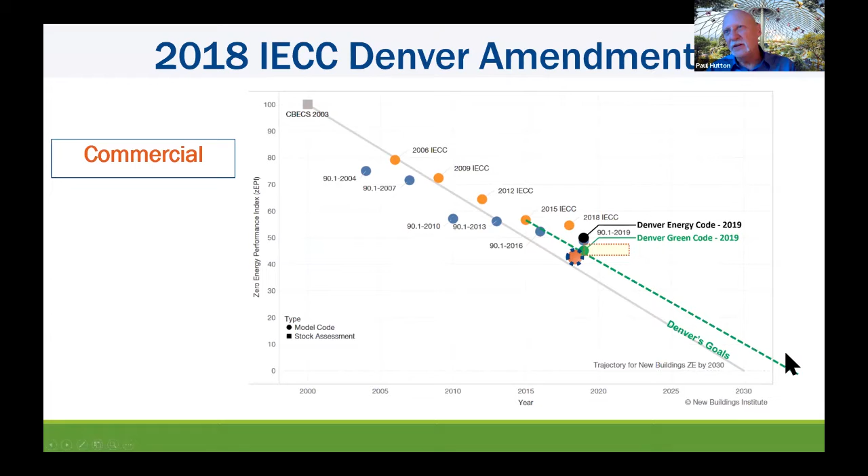Of course you've heard about AIA, but I wanted to mention there are many other organizations and rating systems that we as architects deal with. Probably one of the most well-known is the LEED system, put on by the U.S. Green Building Council, but there are many others now. When we do schools, it's CHPS. When we're interested in health issues, it's often Fitwel or WELL, and International Living Future is another one we pay a lot of attention to—that's about the living building standard, if you've heard of that. As architects, we apply these as appropriate, given the needs of our client and the project.

I wanted to share with you a project that's underway right now, a little further east of you, at Sierra Grande, just on your side of La Veta Pass. The reason I wanted to share this is that it's our first large building in a very long time that is 100% electric. It's also funded by the BEST statewide program, and within the existing construction budget, not as any extra add-on, it has its own ground-mounted PV array. This is a 90,000 square foot building that normally would be highly energy using, but in fact is highly energy efficient and will be net zero.

In fact, it's designed with the standard we call passive house. When we do passive house, it's an approach where we actually take dollars from the construction budget and invest more of them in a better, more highly insulated envelope. As a result, we can simplify and reduce the cost of the necessary mechanical system. That's why we can do an all-electric school in a situation like this, because normally an all-electric building would be very expensive to run. One of the things we're starting to do now on many of our projects is a full carbon model—this is something relatively new for us and most architects.

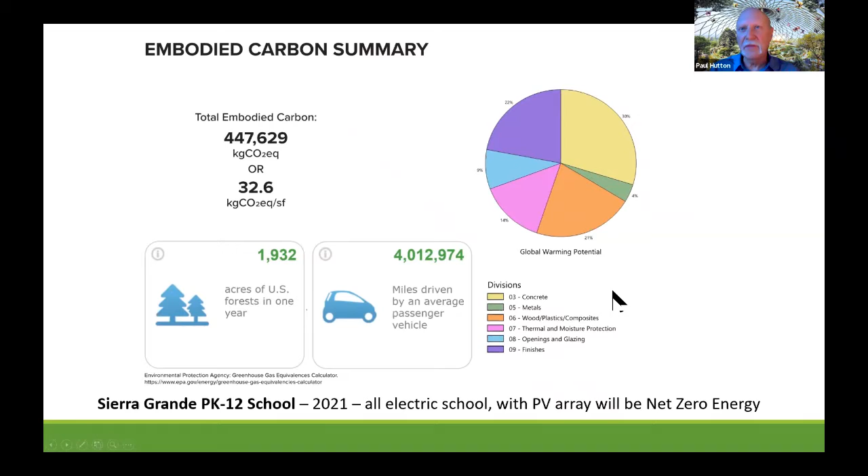And this is one of those buildings that's LEED Silver. I wanted to mention the LEED Silver aspect because it implies a certain minimum level of energy efficiency. This building was required to be at least LEED Silver because there were DOLA, state of Colorado, funds applied to the project. DOLA has been a great supporter of energy efficient buildings - it's a wonderful program we're always excited to work with.

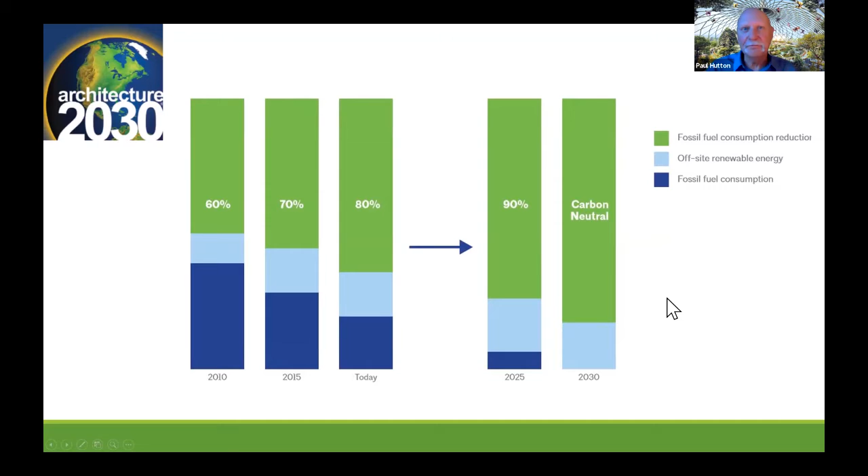One of the things we do as a design firm is model the energy use in every one of our new or addition projects. We calculate that out and report it to a national database. This is our annual report, and this is what it looked like last year.

You don't have to worry about how detailed it is. Just look at that bar on the left, 49.9%, which was the average energy use reduction of our entire portfolio last year. So just about 50%. Remember, the target last year was 70%, so we were 20% behind—pretty good, but we're trying to do better. This year, of course, we're striving for 80%, so we have a lot of work to do.

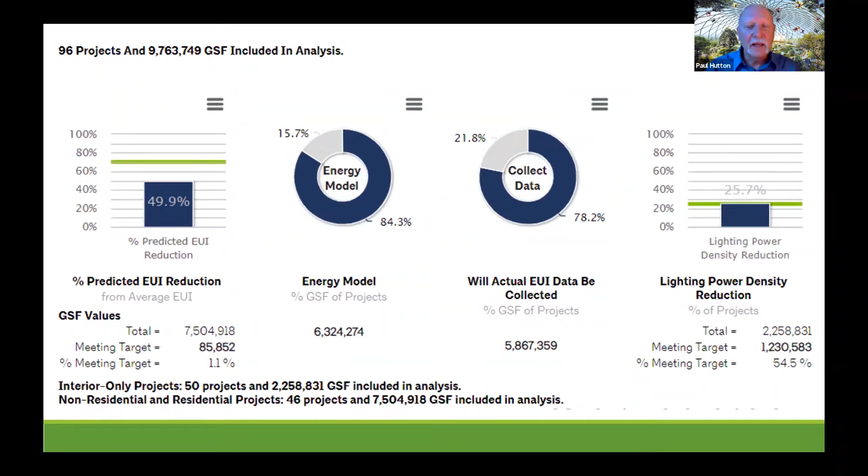We also collect data on a lot of our completed projects. That's this bar here, 78%. We also have a target on how efficient lighting is. The term we use for measuring lighting efficiency is lighting power density. So I just wanted to give you a glimpse at the degree to which design firms are really digging in and understanding the performance of their buildings. This is something that's very important to us.

One of the things we do at Cuningham that's actually unusual is we've looked at our internal operations. We have 6 US offices, 2 overseas offices—one in Beijing that does the kind of crazy stuff you see behind me, and one in Doha. We wanted to know what was our operational carbon footprint, not the impact of the buildings, but how we run our businesses. So here's what we learned when we dug in for an entire year.

We found that all the buildings and offices we occupy were only about 22% of our carbon footprint. Commuting, based on survey estimates, was another 17%. And transportation, especially air travel—because of how spread out our many offices are—air travel alone was more than half of our carbon footprint.

Now, you could probably guess this year that's greatly reduced. I don't think we've had any flights since March 13th, so we're probably going to be less than half of our former carbon footprint. But this is something we're updating on an annual basis, and we have a goal of being 100% offset on our entire internal footprint by 2022. So just 15 months from now, we'll be a net zero firm.

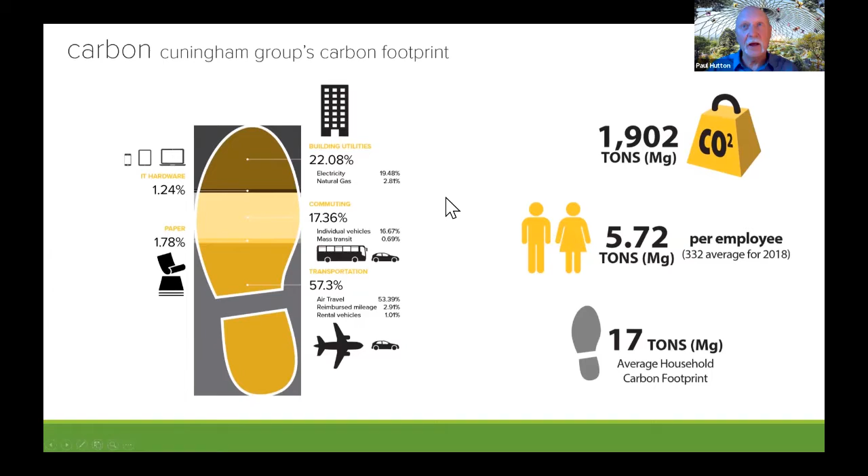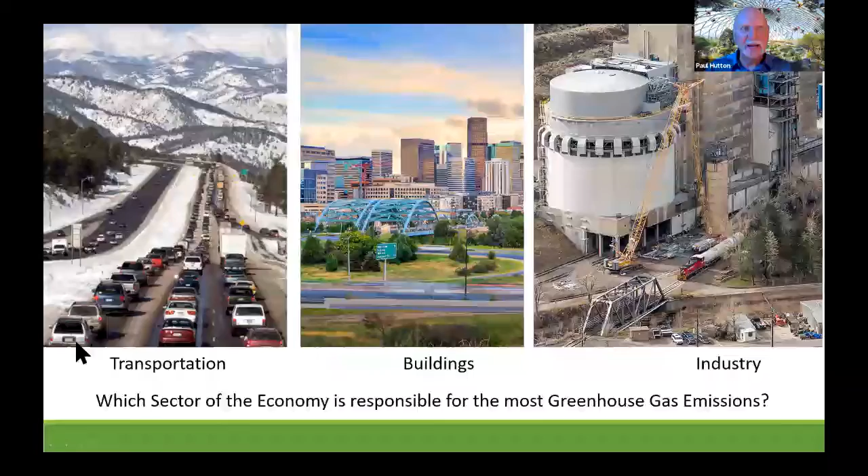So Representative McLaughlin already tipped you off to the answer here. Normally I like to ask my audience: if I were to ask what sector of the economy—transportation, buildings, or industry—is responsible for most greenhouse gases, what would you say? Of course, you already know, you had a clue, it's buildings. And that's a surprise to most people—they tend to think transportation or industry must be more impactful, but that's not the case.

Here are a few more charts to take you through this analysis. When we look at building operations—that's all the electricity, natural gas, propane, occasionally wood we use to keep buildings warm, cool, ventilated, and lighted—that's not too much more than all of transportation. Now look at this big gray blob on the bottom of the pie chart: industry at 43%. You might say, wait a minute, didn't that previous slide just tell us industry was not as much as building operations?

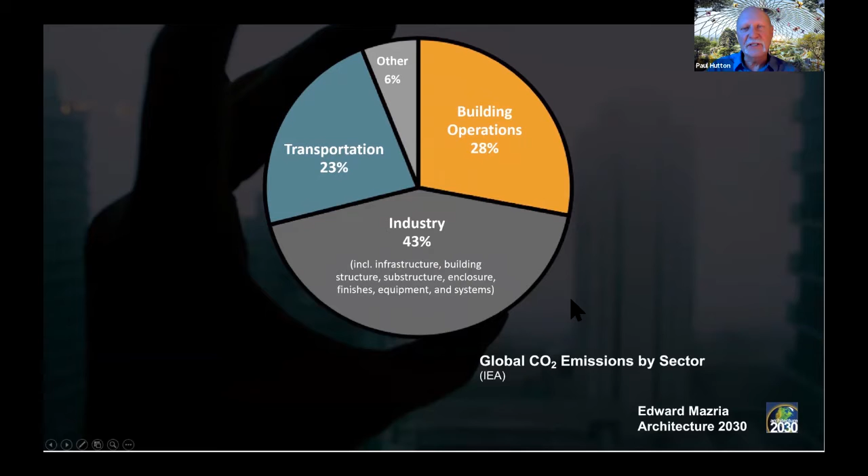What we need to do is break apart industry and see what's really going on in there. When we do that, we find industry actually includes a tremendous amount of materials that go to nothing but construction. Concrete, cement, steel, bricks, glass, aluminum—all those products that end up in our buildings are fully 11% of worldwide greenhouse gas emissions. So when I add that 11% to the 28% that is running the buildings, that's where we get to that 39%, which we often round up to an even 40%.

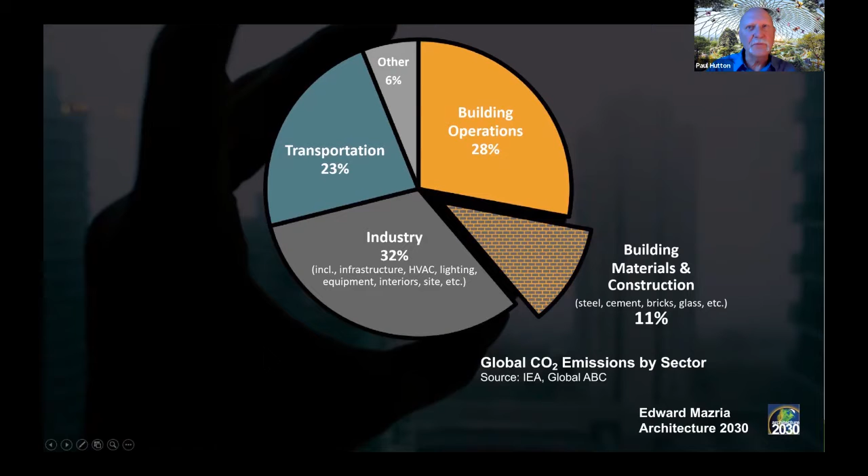So this is the pie chart that helps you understand, and this is global, by the way. The US tracks almost identically to this global picture. So I just wanted you to see that and have a mental image there.

Now when we think about the built environment and where carbon is coming from, there are three big pieces. The first is buildings we're still designing and building between now and the next 10 to 20 years. The good news is we're getting pretty darn good at making those buildings more efficient. We already heard about a member of our audience who has a net zero energy house—once built, it isn't responsible for any greenhouse gas emissions, and we love that.

We still do have a major problem to solve in our existing buildings, because there is no mechanism by which we can automatically upgrade and therefore reduce the emissions coming from those existing buildings. And finally, as I've tipped you off, we now have this issue of the materials, construction, and infrastructure—all that embodied carbon.

It's a relatively new concern for us designers that we've got to start tackling. So those are the three key areas of carbon that we're thinking about in the built environment. I'm going to focus a little more on the material side.

Three key things we can do much better with materials: first, we can reuse. Reuse can take many forms. We can take old buildings and find ways to repurpose and preserve them instead of just knocking them down or sending them to landfill. In Durango, you've got some great examples of buildings that have been adaptively reused through the years. I've had a chance to tour a couple of those.

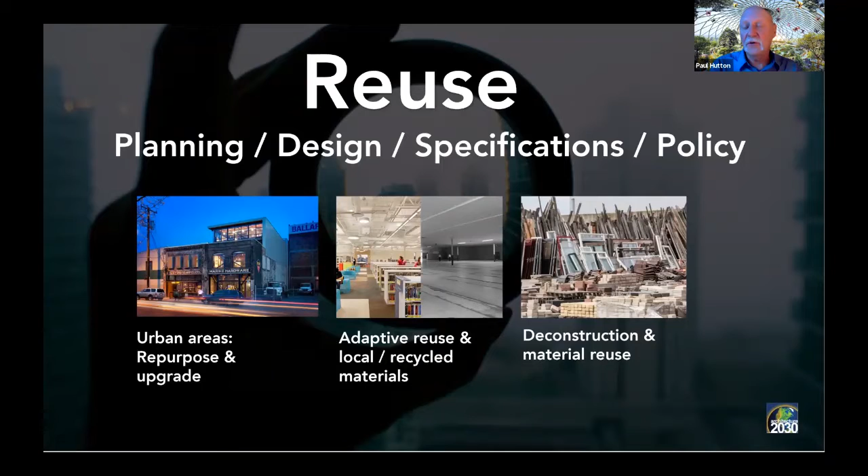So that's a key concept. One of the ways we're thinking about deconstruction is something we call a material passport, which tracks the material fraction in a building—essentially, just like a passport, tracks the presence of that material so a municipality could know what inventory of materials it has within its borders.

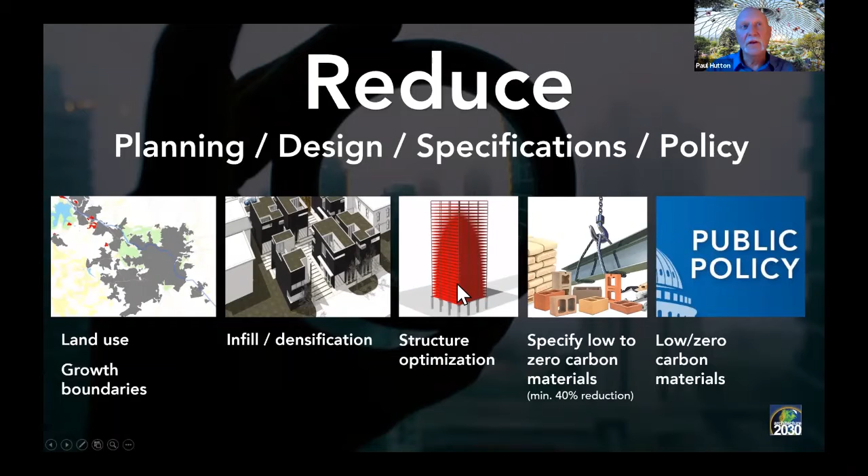The next strategy is to reduce. How can we, for example, design with less? How can we make our houses and commercial buildings smaller and still have the same functionality? How can we take our urban areas, whether a town the size of Durango or a large city, and make them denser instead of sprawling out? Even when designing a building, how can we optimize its design so it uses fewer pounds or tons of material?

So these are all things we're actively pursuing to reduce embodied carbon. And finally, there's the whole notion of sequestering, something I find really exciting. For example—and you'll see a project that does this shortly—can we use wood in a sustainable way? Because wood is sequestering carbon. Can we embed it into our materials, into our buildings, and use it even as extensive amounts of structure? That's something you'll be hearing about.

We're looking at ways that concrete can sequester carbon within it—that's something pretty exciting. We're looking at a lot of biomaterials now. And finally, when we design the landscaping around our sites, how can we design landscaping that starts to sequester carbon? By the way, a lot of typical landscaping, especially if it involves bluegrass, is actually a net emitter of carbon. You have to design a landscape very carefully so it becomes a net absorber of carbon. That's something we're really starting to work with a lot more.

And in fact, we as architects have targets now. Remember I had targets for operational carbon reductions in our buildings with the 2030 program—you might recall we're at 80% target reduction today. We have reduction targets already in place for embodied carbon in these materials. Right now, we're striving for 40%, which is ambitious, admittedly. Here's our timeline to get to zero by the year 2040, only 10 years after we get to zero on the operations side.

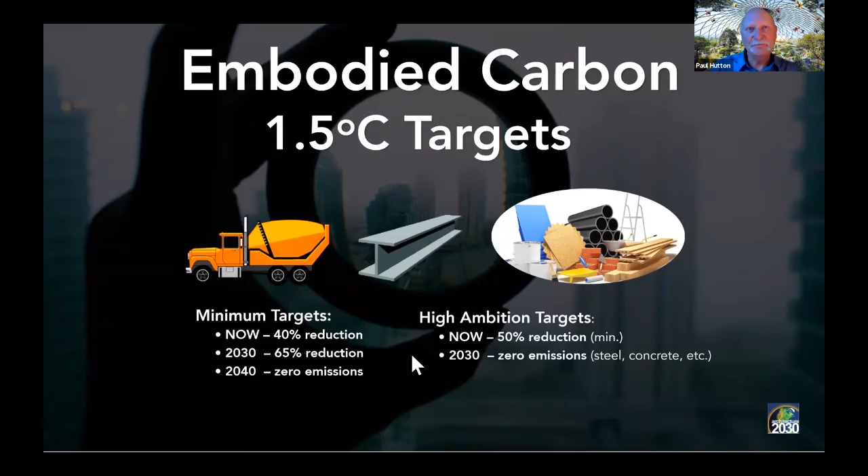I wanted to share that the state of Colorado is active in pursuing this objective. Only one other state has tackled this issue of carbon in embodied materials, and that was the state of California. There was a bill that got pretty far through the process last year before everything went on hold due to COVID, and we're assuming it will be back this year—we're excited to help craft and support it again. That bill, Senate Bill 20-159, said that all materials going into state-funded projects—concrete, cement, steel rebar, glass, and mineral wool insulation—have to meet standards around embodied carbon to end up in state-funded projects.

Pretty exciting development. I think we'll see more and more municipalities, states, and the federal government take this issue into consideration at certain levels.

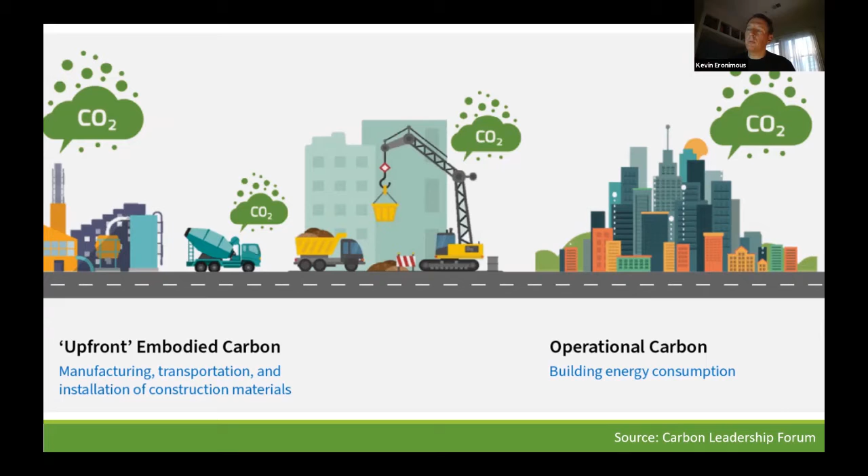And Deborah had used this analogy to help people get their arms around embodied carbon versus operational carbon. A lot of people through the last 6 or 9 months have been spending more time at home doing more traditional things like baking bread. And this one resonated with a few people. I think we can all understand a farmer's field, the irrigation, the fertilization, the harvesting of wheat, bringing that to a mill, grinding it, bringing it to packaging and flouring, delivering that to the store. You can think of that as the embodied carbon component. And maybe the operational carbon component is actually turning on your oven or using your mixer or the lights and gas in your own home. It's a handy way to think of it.

And again, maybe this is preaching to the choir, but beyond the energy aspects and some of the health aspects that John was asking about, really thinking about people, planet, and profit altogether, we need to consider not just the first cost, which can be a problem with, say, developer-driven clients sometimes, but the whole life cycle cost. What's the operational cost? And then look at those in a holistic manner, because I think what we find is a building, yes, can be more expensive to build in a really solid and enduring manner, but over the life of its use and reuse or dismantling, there's a lot bigger bottom line there. So that early build expense often can result or should result in much less operating cost.

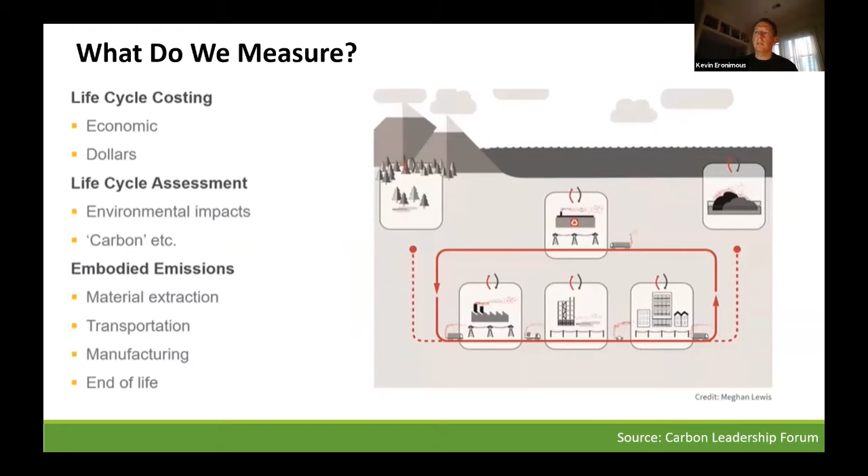So Paul mentioned before some of the things that we are measuring, probably more than we used to, certainly the life cycle costing that I just mentioned. That whole assessment of not just the dollars, but the impact beyond that. And then looking at this list of embodied emissions, whether that's extraction, transportation, manufacturing, and then what happens to it all at the end.

And I don't believe I have the images in this presentation, but as we talk about the mass timber buildings, we'll look at one of those. We're seeing some interesting things happen within the building code that are allowing for taller and taller wood buildings. And of course, that has its benefits in the characteristics of wood being a renewable resource and being so darn good at sequestering carbon.

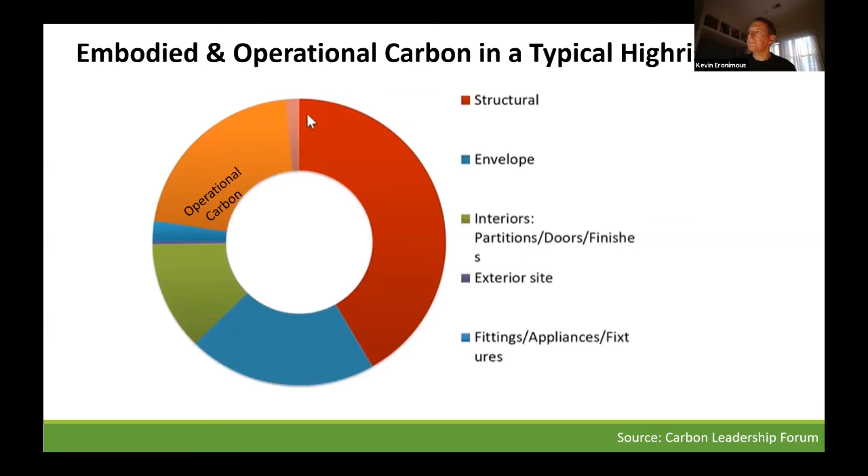One of the other things that we talk about a lot, and I mentioned in the chat before, the International Living Future Institute is a group that we'll spend a little bit of time on today. There's this notion that transparency leads to transformation. And we all probably look at the nutrition label when we pick up a loaf of bread or a bag of chips. And the notion that knowing what is in that product guides you hopefully to make a better choice and put down the bag of chips perhaps and get some vegetables.

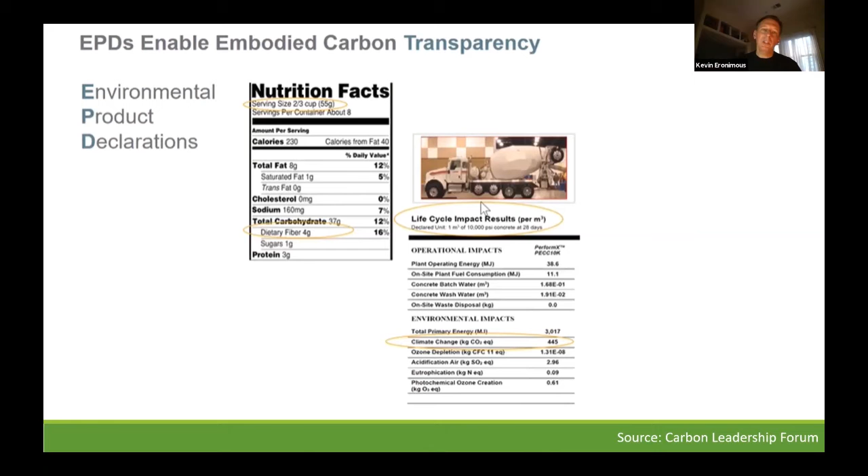That notion has transferred now to the building industry in a couple of ways. This environmental product declaration, this EPD, is something that we're seeing more and more of in a few venues, and it's looking more at sort of an ingredients list for your building. And the JUST label is a similar thing with the International Living Future that actually looks at the social component of your firms as well. So what's your gender equity? What's your pay equity? How do you support your community that you're in? Those lead to a healthy organization, just the way that the materials we select can lead to a healthier building and less impact in the long run.

So this was the small analysis I mentioned between concrete and steel, and as we dive into the materials, it maybe makes us think about those materials in a different way. Concrete, of course, is a centuries-old material. The Romans used this, and it is still standing today. Sort of a technology that was forgotten for an awful long time, and reinvented, or refound, somewhere around the late 1800s, and has certainly evolved in its makeup, composition, different means of strengthening it, and how we use it together.

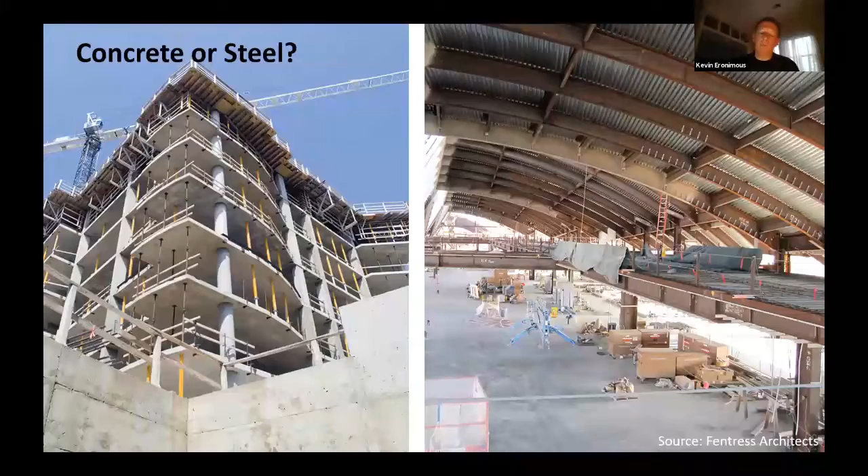And of course, steel has the properties of being able to perform wonderfully in tension, very good for long spans. Both of these materials do have a substantial cost in terms of extraction. So when we look at those carbon impacts of concrete, there's getting this stuff out of the ground. As you make concrete, the cement, the binding agent within concrete, is very energy intensive. It's a firing process, a chemical reaction, and that creates emissions of its own, mixing that as well. And then the transit to a site, how it gets used, and what happens to it at the end of its life.

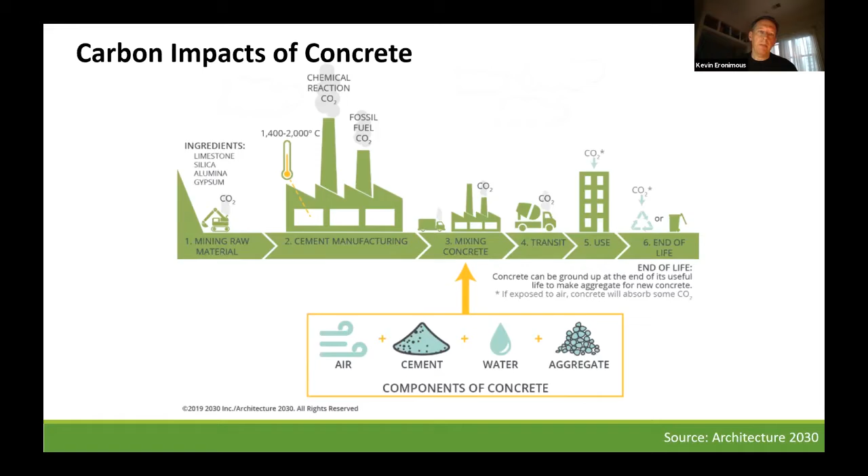So concrete is a little less apt to be reused depending on the form that it was installed in. Sometimes, like a precast building, the T-planks that you see, they can be reused. But a lot of times a building that's concrete frame is generally demolished, and some of that can be diverted back into new aggregate or base or reuse. And then steel, again, the extraction process for the materials is very intensive, very disruptive to the environment.

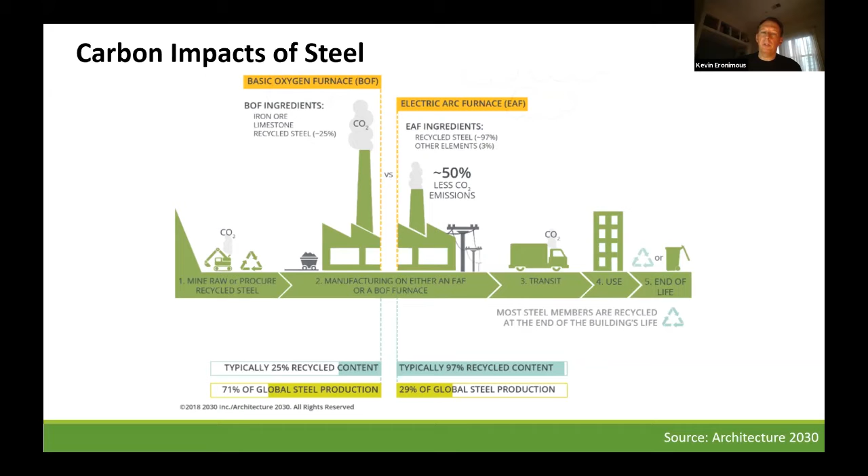And it too goes through this firing process. So this basic oxygen furnace that puts these things in together creates the iron ore that's extruded through. And then you have similar issues of transit and how it's used. You will see that there can be better opportunity for recycled content in steel, and sometimes it has a better chance at the end of its life cycle to be reused.

And that's illustrated in this slide pretty well, that concrete, some of it can be recycled, or downcycled, a pretty good portion of it with a mindful contractor and owner. Timber, depending on the form that it takes, can also wind up with a lot of it going to the landfill. And then steel, despite that very intensive early process of extraction, has a better possibility for reuse.

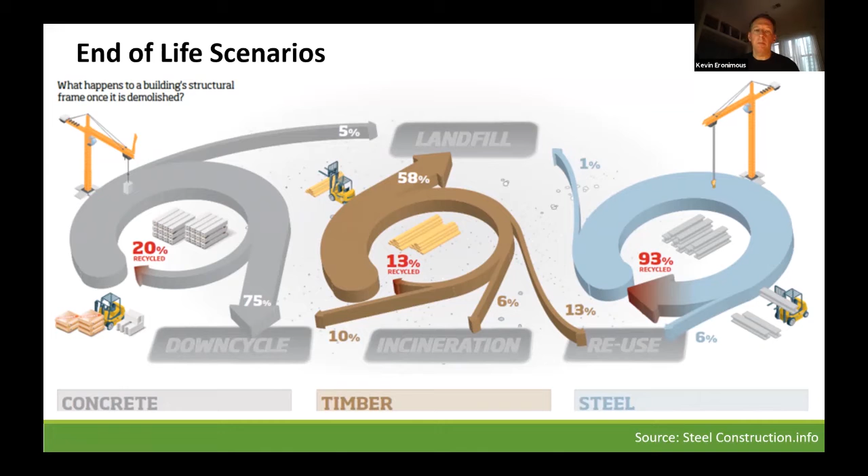So these are all things that we weigh when we're looking through our material options in designing a building. And then there's all the other factors that go into it. How big does it need to be? How tall does it need to be? What are the spanning requirements, and all of those notions.

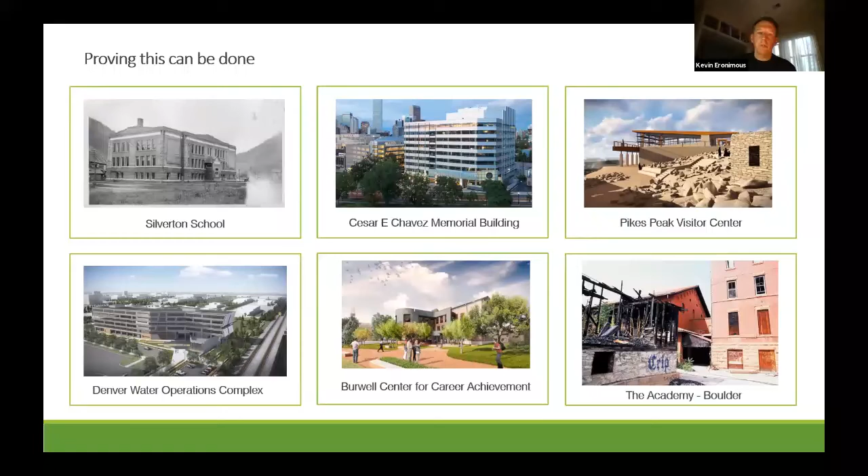So we'd like to talk a little bit about some examples, both near and far, that have varying degrees. With a few exceptions, these are not net zero buildings, but they focus on different aspects of the larger issue. And some of them actually will respond to the questions that were asked. And then I think I have a few that aren't even on this cover slide that we'll go through as well, that are more local to Southwest Colorado.

And actually, we'll start with one. We have two that focus on reuse, and the embodied carbon that goes into a project at its creation, especially when it's a long-standing old building. There's tremendous value in that in terms of the environment and also the character and the history, the cultural connection of a place.

This is Mount St. Gertrude's Academy in Boulder, now called the Academy, which was first built way out on a hill near Chautauqua Park, near the Flatirons, and fell into disrepair, was used by the university, had a pretty bad fire. And I want to talk a little bit about this and the characteristic of owners, because I think John asked this question about what are some things we can do to incentivize people. Hopefully it's not that a fire burns down the building and you have to reconsider the systems completely.

But even with that case of what happened with the main structure here, there's a real dedication required from the client, the owner, and the owner and client that did this project over 20 years ago still operates it. There's some vision, there's some grit and determination that's going to be required to resurrect a project like this. We'll look at something closer to home that looks at that adaptive reuse.

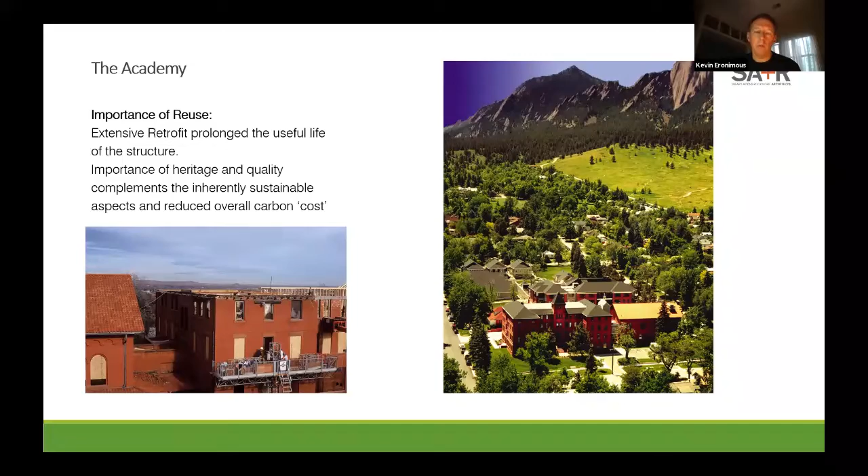But if you picture, especially this building being built in the 1800s, what was the manpower, the horsepower, the extraction to get this material on site, and what's the value of it remaining there rather than being torn down, even after an unfortunate fire, to being reused again. And this one is similar, and this speaks again to the client type.

So the client in this case is GSA, the General Services Administration, and this is a building right near downtown Denver. You can see it off the skyline off to the left there. And this is a unique example of an adaptive reuse for several reasons. Maybe the most notable from the contractor's point of view and the occupant's point of view was this entire building was reskinned while it was actively being used, while it was being occupied.

And I recall seeing some chatter about it of, couldn't they build the building a little bit better? This was probably a building built in, I think, the 80s. So there was some criticism of, why did they do such a poor job with that building to begin with, that they needed to pull the whole skin off. And I don't think it was a particularly poor building for its time. But really it was, whoops, I skipped ahead there.

General Services Administration, the GSA, are data junkies. They love to analyze cost, performance. They have metrics on so many components. So somebody in probably a cubicle in a very not well lit office somewhere ran the numbers on this building, and they said, rather than tearing this building down and building a new one, or trying to change out just the glazing and getting a marginal return, they literally removed the entirety of the skin of the building and put in a higher performing, better insulated skin with better performing glass.

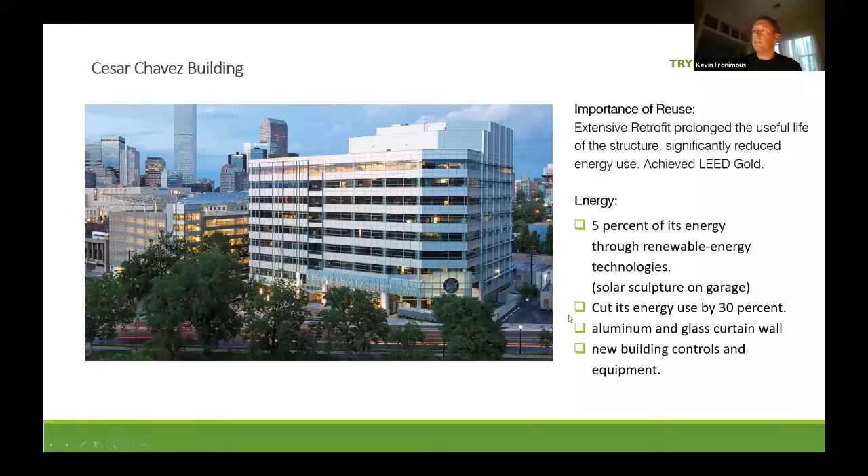To be able to do that during occupancy really takes that commitment from the owner to understand this building will use less energy if we do this. It's going to extend its lifespan. We're going to keep the benefit of the concrete frame of the building rather than losing that component. And then they added this solar photovoltaic array, which is quite prominent from the bike path just below the screen here, and anywhere you drive by on Speer Boulevard here in Denver, as a visible and artistic element of renewable energy being a component of that smarter reuse of the building.

And then another building that teaches closer to home here—this is a rendering, but the building is now complete—from our friends at Stantec Architecture, is the Denver Water Center.

We like this building for a few reasons, not only because of its energy efficiency goals and its mindfulness about operational and embodied carbon, but the notion that they run the water for Denver and the surrounding regions, and that they can make this building approach net zero from a water use point of view, is a real commitment. It speaks again to the commitment of a client, the mindset of going into a project saying, how can we do this not just the same old way? Whether that's gray water reuse, collecting rainwater, basically creating a water treatment plant of its own within its own facilities and having a bit of a closed loop to that water cycle system.

And then going a step farther to actually educate the public about that. So wherever those elements exist in the building, it's set up very well to accommodate tours for people to understand and see, probably not quite touch, but see how the systems work—reconsidering a building as a system rather than just a container of people and things.

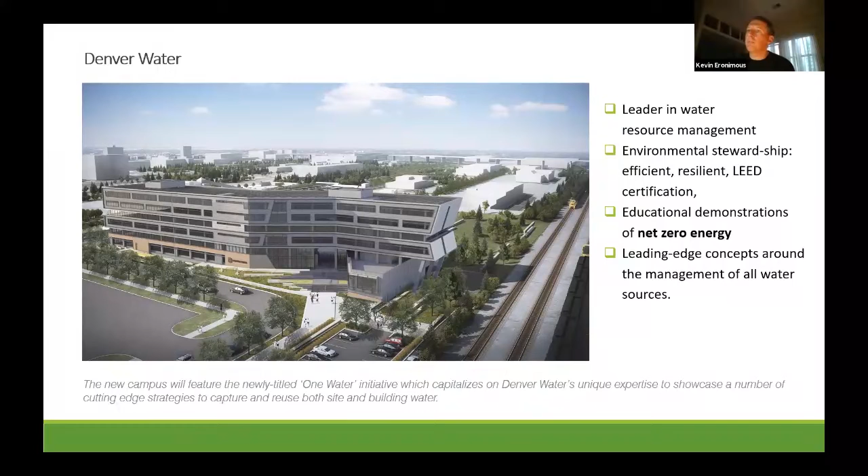And then I mentioned mass timber a little while ago. This is a project of ours—we're partnered with Lake Flato out of Texas—down at DU, Denver University. This is a student achievement center, basically a career connectivity piece to the professions the students are growing into, and a very critical resource component of their quad as they're going through a lot of building on that campus. One of the unique things about this structure—and I've deliberately used photos in construction because they're pretty compelling—is the utilization of this mass timber approach.

It's an acronym called CLT, cross-laminated timber. What this does is it uses materials from younger growth trees, usually about 10 to 15 years old, that can be sustainably forested and actually contribute to thinning forests out to avoid some of the wildfire considerations you have with forest management.

But it takes—instead of, you might see this if I was downtown at my office right now, I sometimes point up to the ceiling, it's a big old warehouse building with giant wood beams in it—those trees, of course, would be a tremendous loss if you're taking down old growth forest. We've done too much of that. We kind of screwed it up on the first go around, and we can't do that anymore.

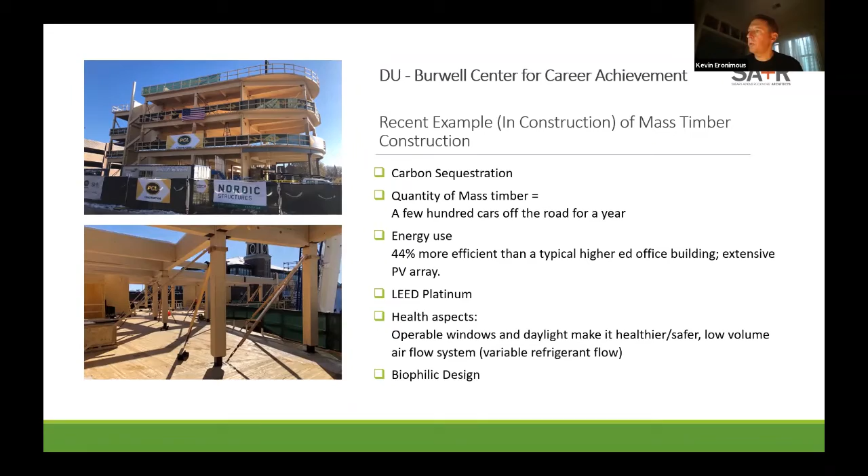I think it helps understanding if you look at a column or a beam and understand what that thing is made of and how it's supporting and sheltering you.

So as we go through, that gives us the opportunity to look at existing building stock, and this neighboring community in Silverton, to reconsider the craft, material, and quality of buildings from 100 years ago or older, or more recent.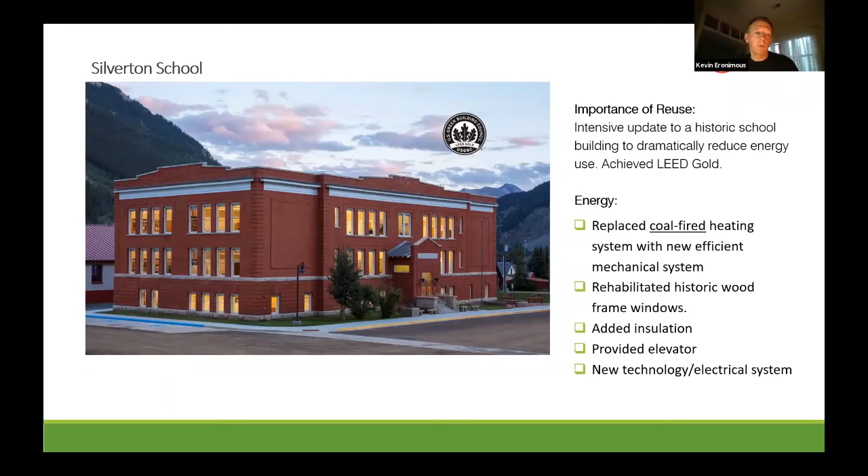But reconsidering a building holistically - going through its systems, going through its enclosure - and understanding how those components can be improved and sustained for the next generation.

I'll move on through a few others. This one Brandon had in his presentation - I didn't learn much about it, but up to the north a little ways, a new project also planned by Anderson Hallas. I wanted to highlight one component of this: EUI, energy use intensity. I mentioned before the transparency leading to transformation, like a nutrition label or material label for your buildings. This is a similar idea.

Think of your MPG, miles per gallon, for your car. Energy use intensity is really your kBTUs - kilo British thermal units per square foot per year - that you use. It's just a way to look at this. 25 for a library is really quite low, a very aggressive target. You might find a similarly constructed building that wasn't so mindful and didn't employ some of these strategies use as much as 3 or 4 times more energy.

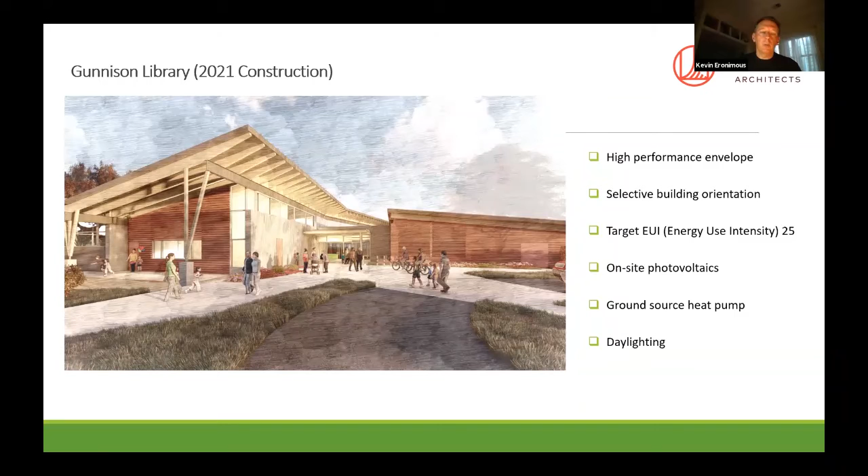The other component of this, when we talk about embodied carbon and operational carbon, is that doing the best we can with the envelope is really the first step. On-site renewables really aren't there yet to get us past a poorly performing envelope. So orientation is critical, insulation is critical - we need to get the building to do as well as it can. Paul mentioned the passive house strategies on the one school. We need the buildings to do as much as they can, and then make up what we can't with renewables.

In the south part of the state, I was looking around for some images closer to home and wanted to talk about that structural frame issue. So as we go from very large concrete building scale to smaller scale things - for instance, in a residential market - straw bale construction is a consideration for small and large buildings.

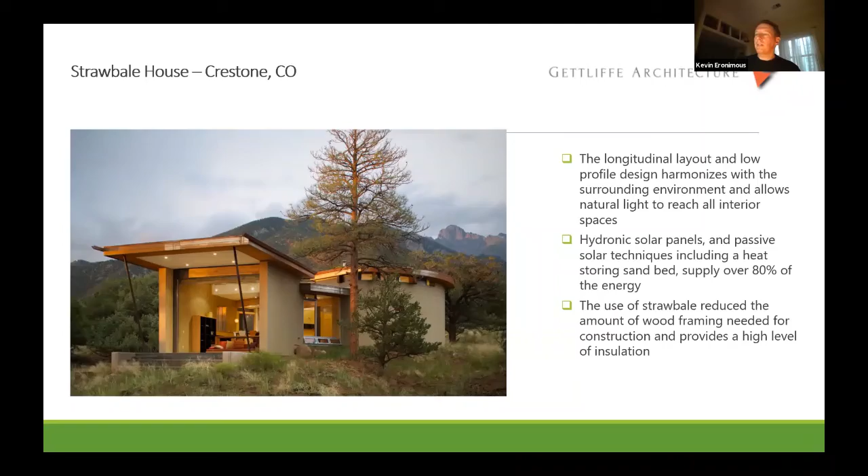I thought this was a really lovely example from nearby. Gettliffe Architecture is a Boulder-based firm, but they came up with this beautiful building down in Crestone, and you get a sense of how those mass-heavy walls are built out of straw bales.

I think I have another construction example - this one also in the southwest corner of the Four Corners area, at Bluff, Utah. Design Build Bluff is a program where students from the University of Utah and the University of Colorado combine efforts to design a building, a house, in one semester, and then actually go out and build it. So it's a design build program. Rick Sommerfeld is the contact we know on the Colorado side of this.

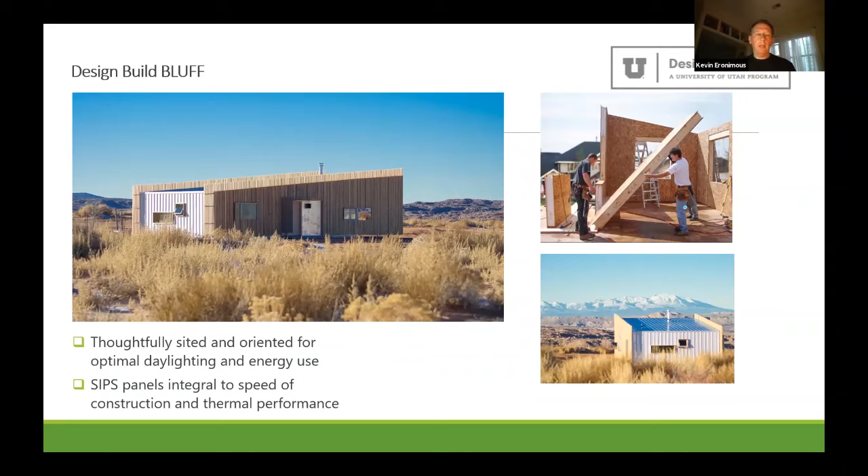All of these buildings are incredibly thoughtfully sited. They're usually very energy efficient. I highlighted this one for its use of SIPS panels, a structural insulated panel you can see this gentleman standing up with. This isn't from this project, but it allows you to put together a very well insulated wall and also eases the speed of construction. That's another component of the CLT buildings I mentioned before—pieces that come as built pieces are quicker to assemble than individual sticks, and then layers on top of those.

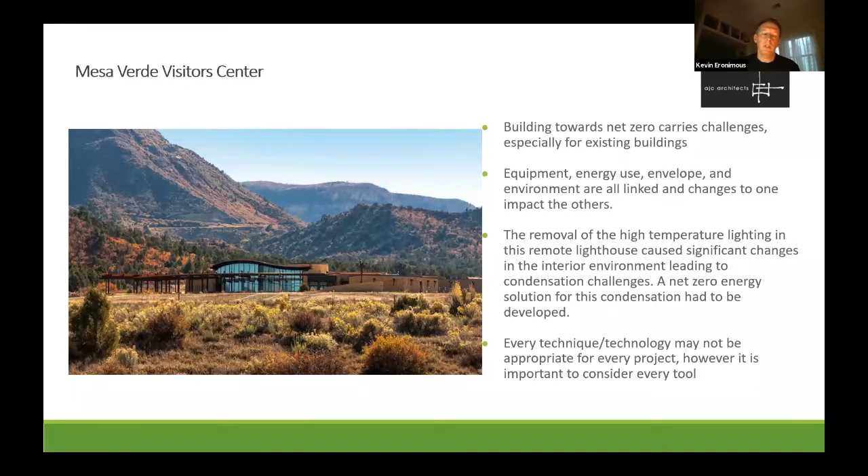This may be one of the last elements I have closer to home—a LEED Platinum Visitor Center at Mesa Verde. I believe I have the wrong notes next to that, but they're close by, and I think it's nice to know buildings that are close to home. I've been to this building and it has a pretty good explanation and some truth windows, little openings in the wall where you can see how the building was constructed. It ties together the cultural aspects of that place as well as the performance aspects.

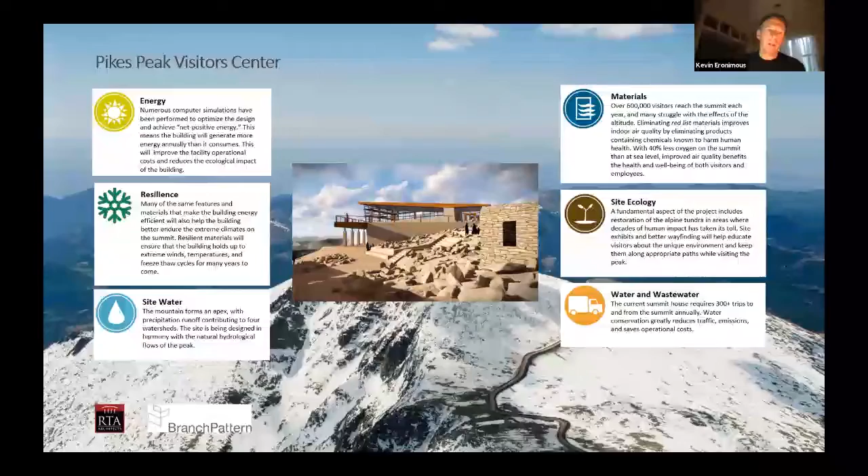And this isn't just pie in the sky thinking. At the time this slide was put together, there were 115 certified projects around the world, and many more underway. In fact, here in Colorado, at the top of Pikes Peak, 14,000-plus feet above sea level, the new visitor center being built there is a Living Building Challenge building, and it's a remarkable environment. Being Coloradans, I'm sure a few of us have been at the top of a 14er in some pretty difficult conditions, and to conceive of a building that can be self-sustaining on its own in that environment is really remarkable. That's from our friends at RTA Architects in Colorado Springs.

I think we're okay on time for a few more questions, and we can dwell a little longer afterwards. As we close, what we really hope to do was help people understand the impacts and potential of our built environment, and raise that awareness—ask us all to ask questions of the people that help define our built environment, whether that's the architect, the general contractor, your municipality, or a college, or maybe you're doing an office refit or considering something for your own home. Really dive into it more and ask your architect. And if you're not working with an architect, we'd encourage you to do that, but also to be advocates for your own space and your own environment.